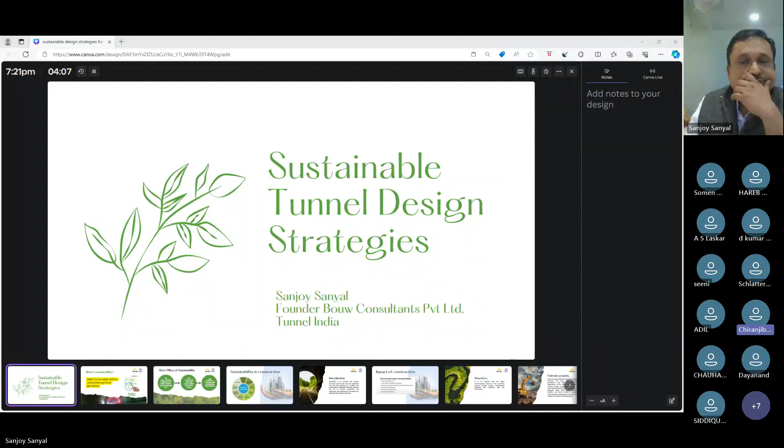Just let me know if it is visible. Yeah, it's visible sir, you can continue. Okay, it's visible right? Yeah, it's visible. Sir, if possible, you can also switch off your camera, maybe. Yeah, then you can continue again. We can turn the camera on again in the question answer session sir. Yeah sure.

Now I'm here to briefly present some strategies for designing tunnels based on sustainability aspects. As you know, a lot of things are happening around us with regards to sustainability and environmental aspects. When we talk about sustainability, it is not only about planting a tree.

It is more than that. Sustainability, if you define it as per UN standards, was developed by the Brundtland Commission, which says that sustainability is all about meeting future needs.

Hello, can you mute this? Yeah, I think my screen is visible right? Hello. Hello, yes, yes sir, yes sir.

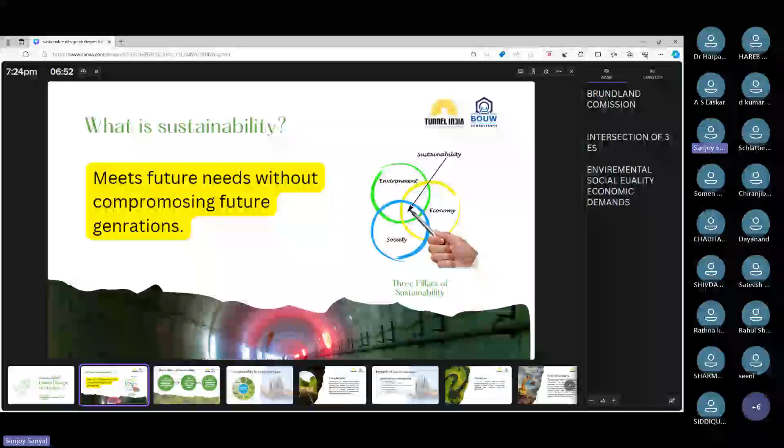So when we develop any project, any work we carry out for development, we must take care of these three circles of environment, economy, and society. We should coexist and meet our future requirements, like we need infrastructure, we need to extract minerals, we need to use energy, we need to use water resources. The main purpose would be using the resources in such a way that it does not hamper or jeopardize the requirements of future generations.

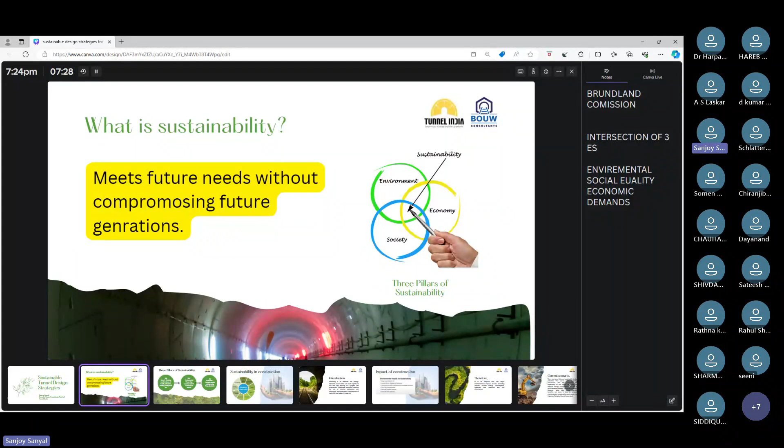If we go a little more in detail, we can say sustainability basically has three pillars. One, as I already explained, is social. Second is environmental, and third is economics. Social defines meeting needs in terms of health, education, housing, development, etc. Environmental is all about preserving species, natural resources, and energy. And economics is about creating wealth and improvement of living standards.

Now, sustainability in construction. When we talk about a specific application of sustainability in construction, it involves a lot of activity - we use energy, we use environmental resources like water, we extract minerals, we use steel, we consume cement and other minerals. In the process, we also produce waste, during the manufacturing process and even during the construction stage. So in this respect, we also need planning, like how we are going to utilize our resources to minimize waste. That planning, that strategy, is also part of sustainability.

When you talk about sustainability in material, we can use innovative material, like we can replace use of steel with GFRP, polypropylene fiber, or similar things. When you use high tech material, we can reduce use of material.

In case of a tunnel, if we do lining, we use concrete. In order to produce concrete, we generate a lot of greenhouse emission, a lot of CO2. So our motto, from the design stage, should be such that we use optimal or minimum quantity of innovative material, so that carbon emission can be reduced.

When you talk about other activities like climate adaptation, our design should be such that it does not hamper our environment. It should comply with nature, as far as possible the environmentally conscious design - that is also part of sustainability in terms of construction.

When you talk about procurement, we need to have a proper plan and strategy, how much material we need to procure and at what time, and what kind of material we can reuse, like excavated soil, excavated rock - how much you can use in a bridge, how much you can use in backfill. All this needs to be pre-planned so that we try to use local material and avoid transportation, since transportation creates a lot of greenhouse emission, CO2, and pollution.

So all this aspect is a part of sustainability in construction.

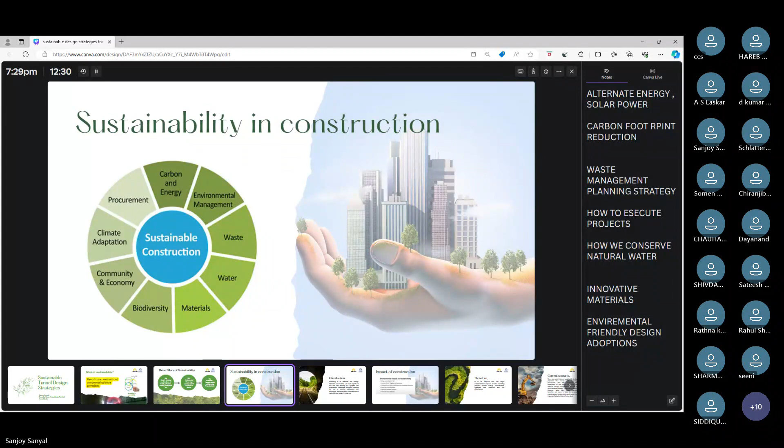Now we are coming down to specific application in a tunnel. Tunnel construction is an extremely energy intensive process that can have significant site and cost bearing on a project and community. Traditionally, tunneling uses massive equipment and machinery and substantial consumption of material and natural resources. In a tunnel or any construction project, we use maximum land, maximum material, and maximum natural resources.

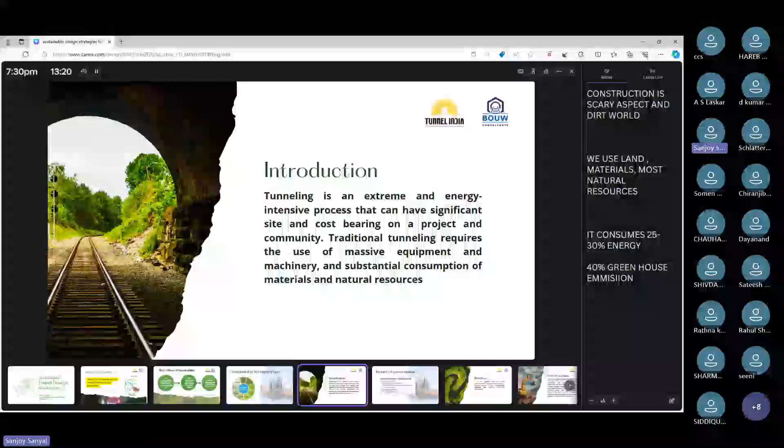Overall, construction consumes around 25 to 30% of the energy we totally produce, and 40% of greenhouse emission generated is responsible from this construction activity.

Now, the impact of construction - there are some key points. What is the impact on construction and environment? We see it is a major contributor to CO2 more than any other industry. Around 40% of all global CO2 emission is from our construction industry. It consumes over 60% of extracted non-renewable resources. Over 50% of landfill waste is generated by our construction activity. Over 40% of water pollution is generated by our construction industry. Over 20% of air pollution is generated by construction.

Therefore, there is no surprise that the major environmental impact of tunneling includes energy consumption, material and resources, and site disturbances. In the process of developing a tunnel or any construction, it creates a lot of disturbances around the location where we execute this kind of project.

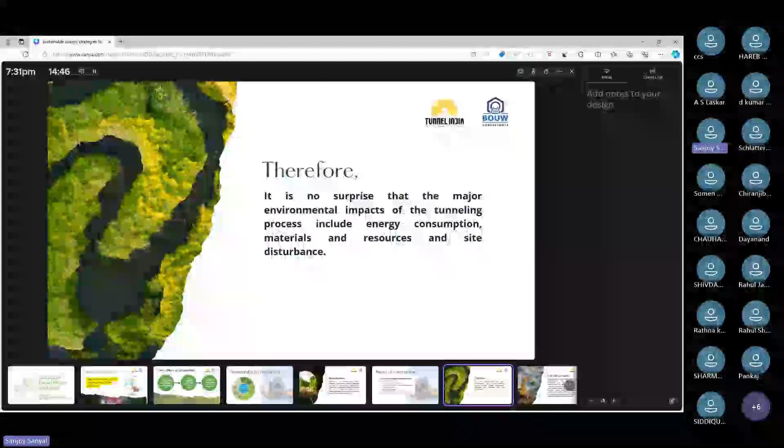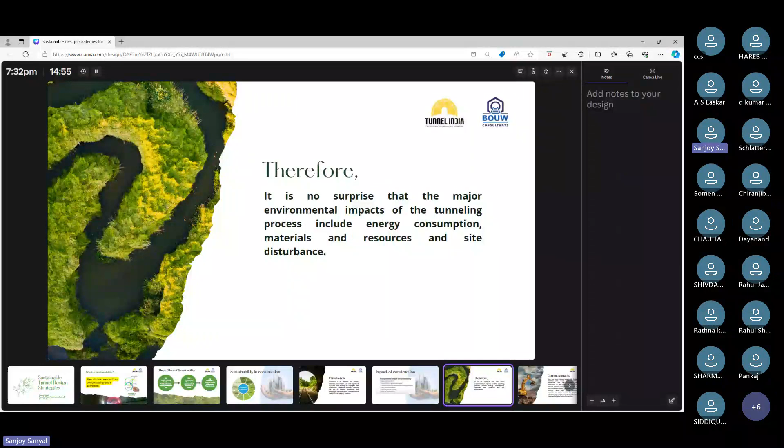It even disturbs local people and their earning. Sometimes you disturb their resources and their earning, the way they live in a forest.

Other than this, some of the things we do - we are not exactly doing that much, but we are using solar energy for tunnel construction and tunnel maintenance, and during the life cycle of the tunnel.

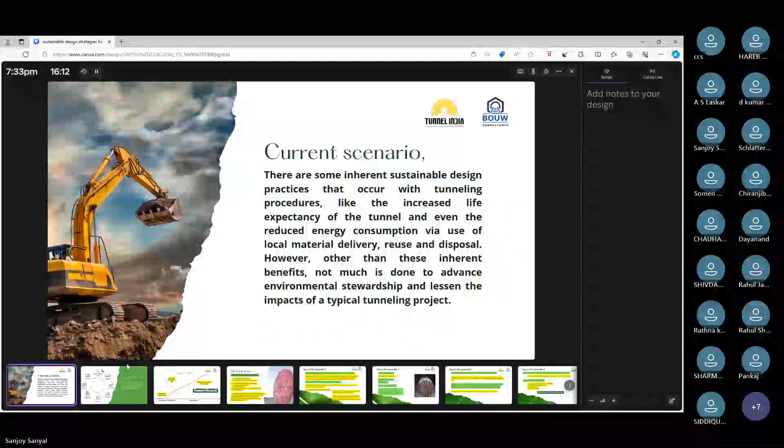Now, if we really want to develop a sustainable tunnel design during its life cycle, it involves various stages. It uses extraction of raw material from the mines, then it is transported to factories, where they produce cement, steel, rock bolts, and other mechanical and electrical items, and again we transport it to the construction site.

Construction depends on the methods, how we are going to execute it, what are the steps, what are the things, and exact planning is required. Then when the construction is completed, it goes on to maintenance and operation. When the structure is in use, then it comes under maintenance and operation.

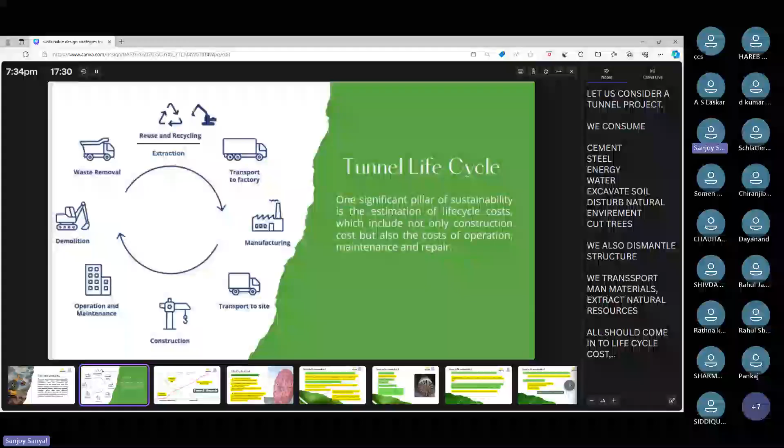That involves a lot of energy, a lot of material needs to be replaced, or we need repair, rehabilitation, strengthening. Then it also comes into demolition.

During the construction process, we demolish something. We need to develop a strategy for how we are going to reuse that demolished material, and then the waste removal. When you use the demolished material, you cannot reuse 100% of it. Once you use a certain part of the material, the rest you need to dispose of as waste.

So this total life cycle includes extraction of raw material or ore from mines, and goes up to tunnel demolition. All this aspect needs to be taken care of. It is not only about the construction stages, like we get the steel, cement, and just construct it. All the life cycle of the tunnel, starting from extracting ore to disposal, should come into picture if we want to really develop a sustainable tunnel design.

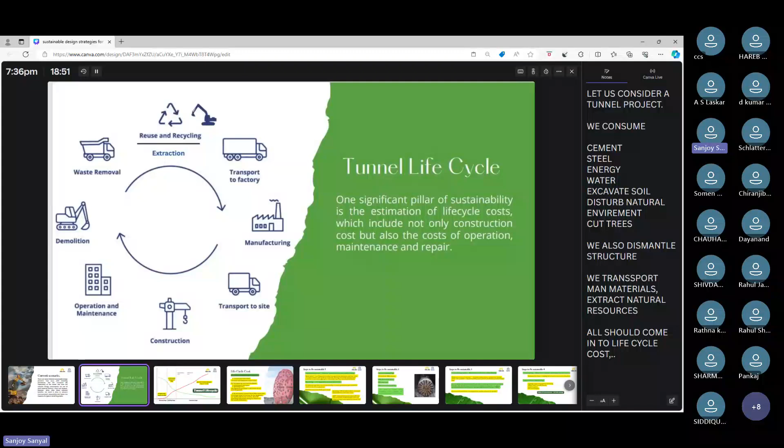And if you do not invest, do not do proper study at the beginning of the tunnel stage, like DPR stage or something like that, then the cost goes up. You do not have control over it. So it is always better that the DPR and other preliminary studies should be carried out very carefully, so that the overall impact during the life of the tunnel is reduced during the operation stage.

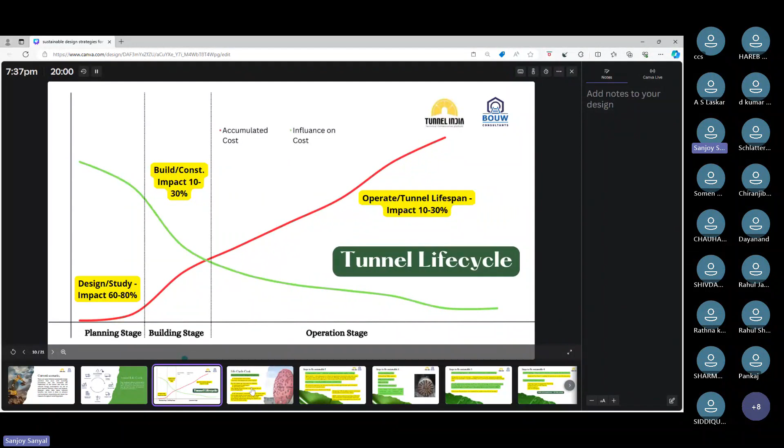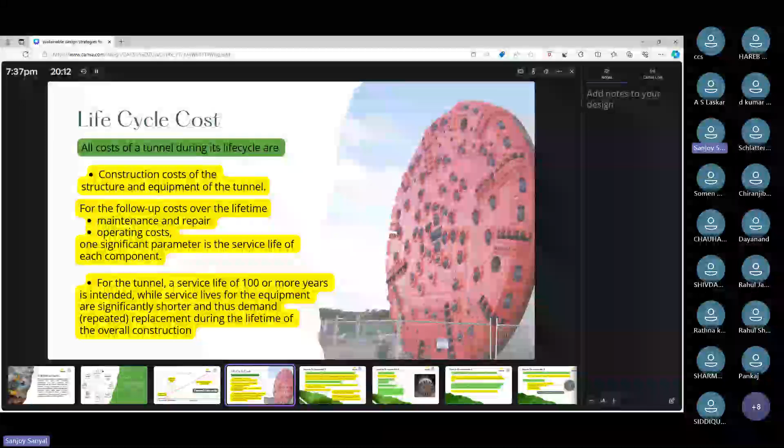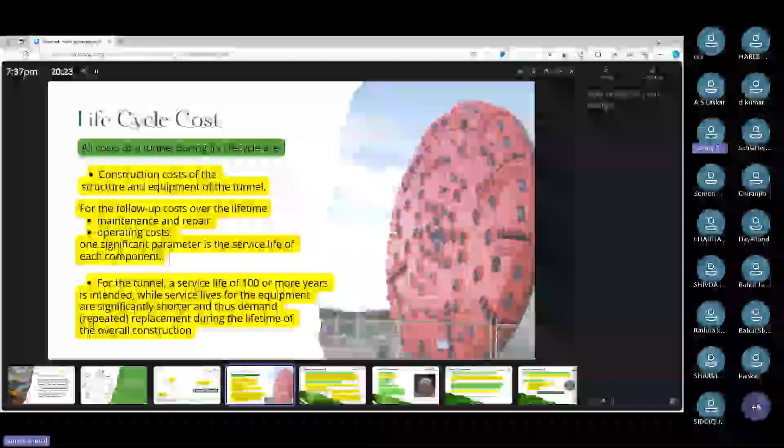Now, as I explained, life cycle cost includes all the cost of the tunnel during its life cycle: construction cost of the tunnel structure and equipment, and the following up cost over the lifetime - maintenance, repair, operation cost. One significant parameter is the service life of each component. We know that concrete can achieve 100 years of life and more, even more. But for mechanical parts and electrical parts, we have very limited life.

We have maybe 20 years. So our planning must be such that the replacement cost should be as optimal as possible. How can we do that? I think we need to develop a monitoring strategy or maintenance planning, like maintenance or repair planning. We need to have a periodic schedule of inspection, like visual inspection, detailed inspection.

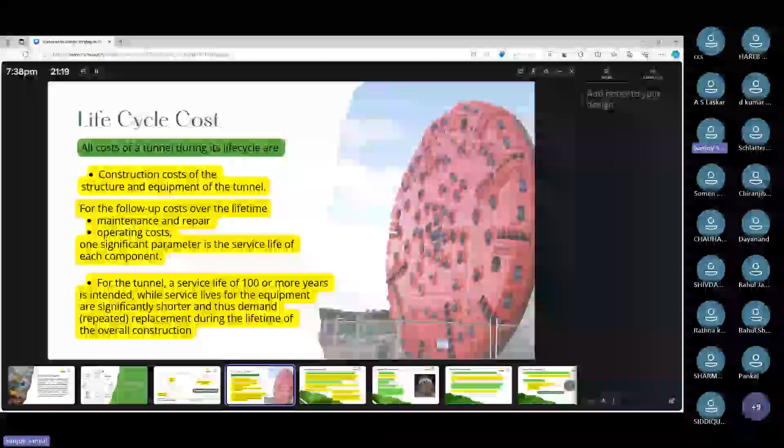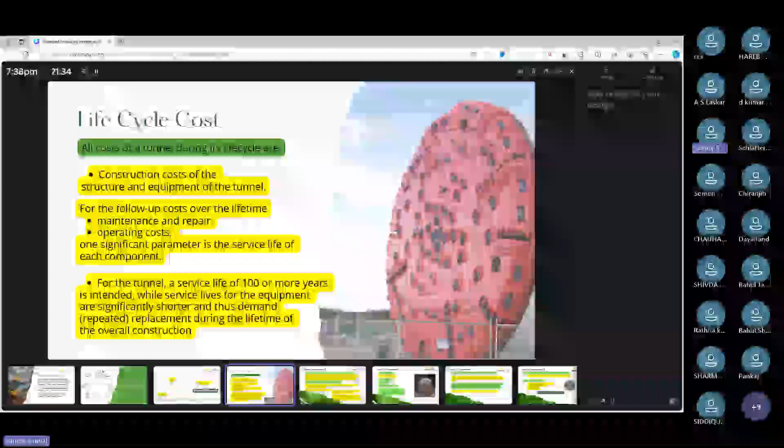Visual inspection can be done every month, or maybe twice yearly. We can do more rigorous inspection every 2 years, maybe every 5 years. We can do more detailed investigation. There are guidelines available internationally, so that we can plan it. We can plan the maintenance operation in such a way that we replace or take action so that tunnel operation does not get disturbed or hampered.

Suppose in a tunnel, the life of a particular electromechanical equipment, or maybe some lighting, ventilation system, SCADA system, needs to be replaced. So we need advanced information. If you do periodic inspection, you know when to repair and when to replace it. If you do not have any knowledge of what is happening there, you will end up in trouble because these equipments are not readily available.

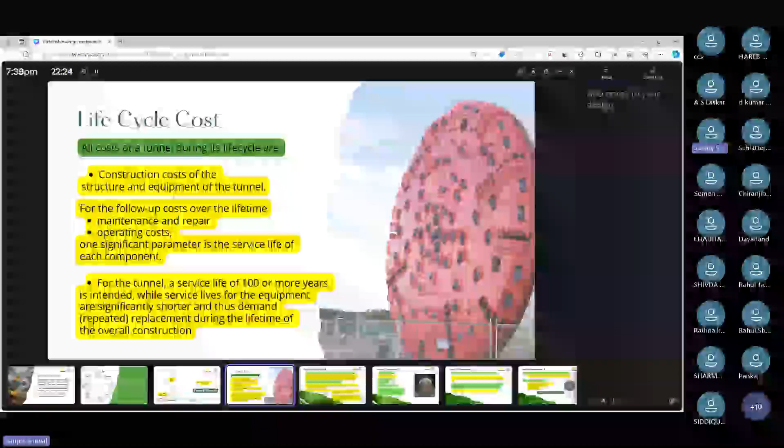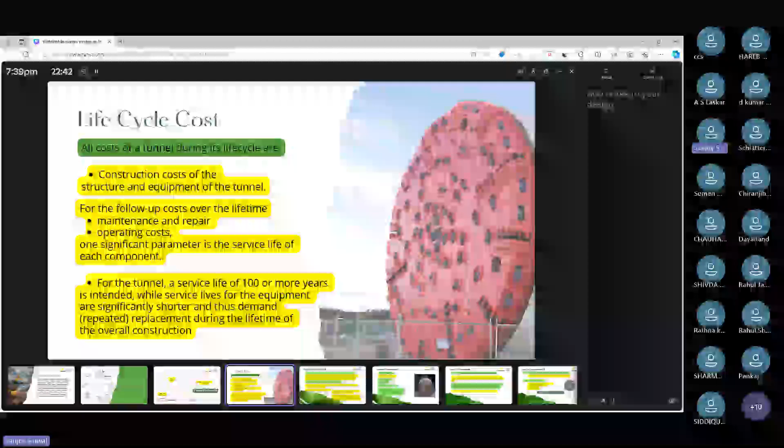So you need to have a plan, a definitive plan, so that you know which equipment needs to be replaced at what time, and when you need to raise a query, when you need to raise a purchase order, so that equipment reaches the site at the right time. Otherwise you never know that certain electromechanical equipment stops working, and you do not have any replacement for that, and you have to wait 2-3 months, so your operation is hampered.

As I already said, the service life of a tunnel is intended to be 100 or more years, while service lives of equipment are significantly shorter - there's a demand for repeated replacement over the lifetime, affecting overall cost. Sometimes what happens is that the civil construction cost is overtaken by this maintenance and replacement cost.

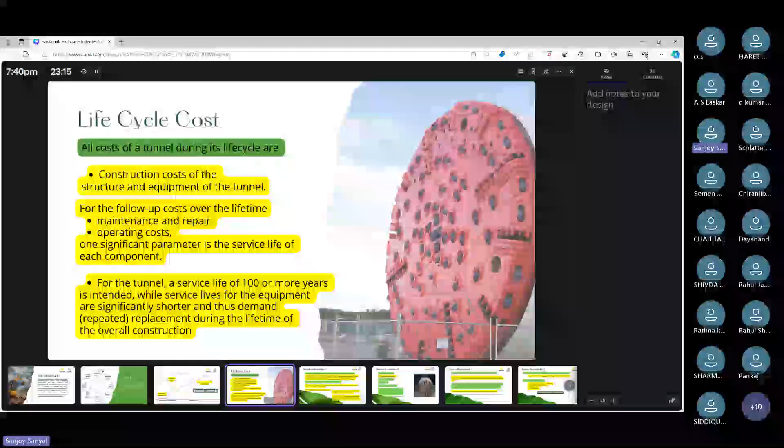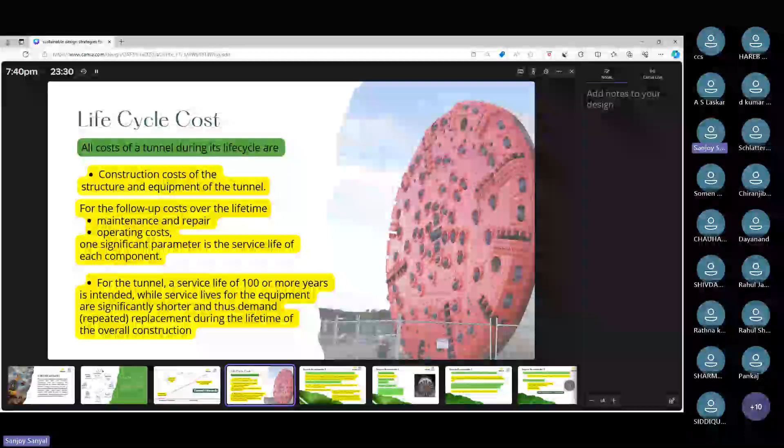If you consider 100 years of design life, and 20 years is your electromechanical equipment service life, then you need to replace it at least 5 times. If you consider electromechanical and other costs as 20%, you can multiply 20 into 5, so it is going to catch up with the construction cost of the tunnel. So we need to have a definitive plan.

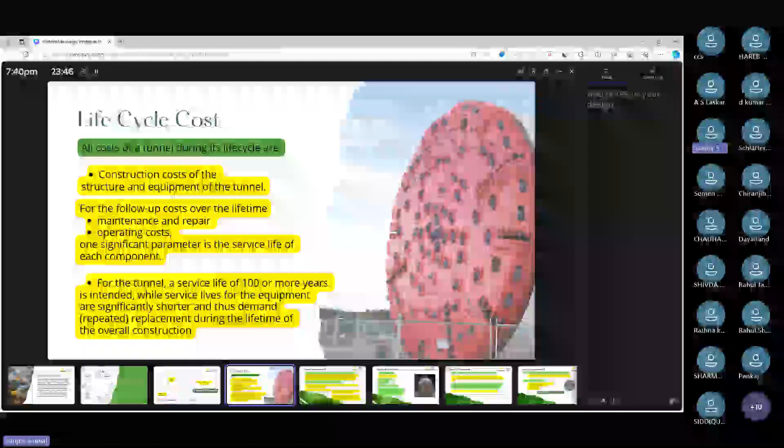Sustainability is not only about planting trees, it is about overall planning. You need maintenance planning, waste management planning, water treatment planning, like how we deal with drain water, how we utilize maximum energy, how we evaluate alternate energy like solar, and do we really need ventilation? That's a question I'll come to a little later.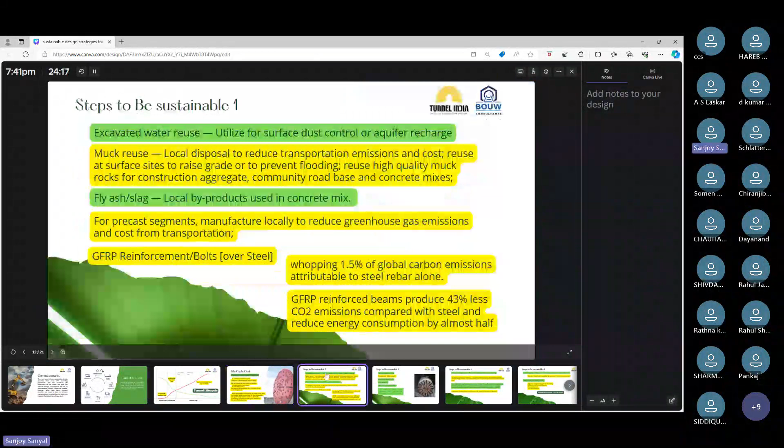Now let's go to the next slide. There are a few basic tips on how we can be more sustainable in our tunnel applications. Like excavated water reuse - you can utilize it for surface dust control, or maybe aquifer recharge.

For muck reuse, it is always advisable to consider local disposal and transportation. If you have lakhs of cubic meters of excavated rock or soil and you want to dispose it off totally, you need to transport it. For a tunnel like 5 or 10 kilometers, every day a truck which can carry 10-12 tons has to make n number of trips. It will generate huge amounts of emission.

So it is always better to have beforehand planning on how much muck we can reuse, either as a backfill material or as aggregate, fine or coarse. We can use fly ash or slag as local byproducts in the concrete mix, because the cement we use - slag is the byproduct.

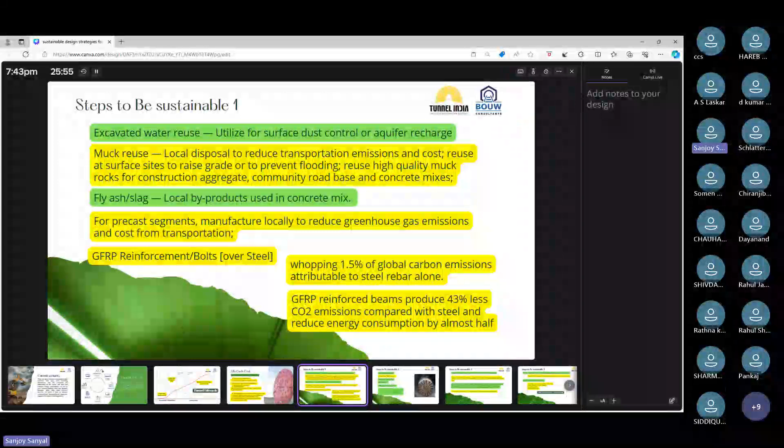Another way to minimize carbon emission is the use of precast segments. These are mostly used in metro tunnels, TBM tunnels, but even in conventional NATM tunnels this can be done. And GFRP reinforcement and bolts over steel - if you consider this, it's still not widely used. We are using it only for temporary bolting, like face bolting, or temporary construction works. However, this can be a good solution for the future when more detailed specifications and guidelines come in.

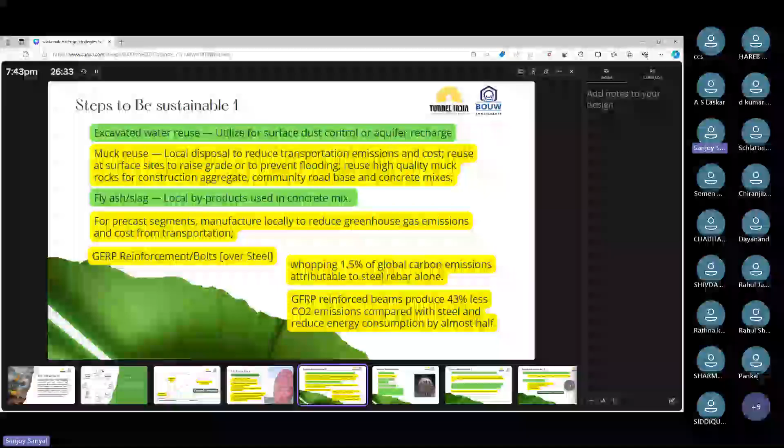1.5% of global carbon emissions are attributed to steel rebar alone. So if we use GFRP reinforcement bars, it will reduce emissions by 43% compared to steel bars.

Now another critical aspect is refurbished TBM. One TBM weighs around, not 200 tons, but maybe 1,000 tons. So if we can reuse it, that will obviously give us a more sustainable solution in terms of current projects, like refurbished TBM.

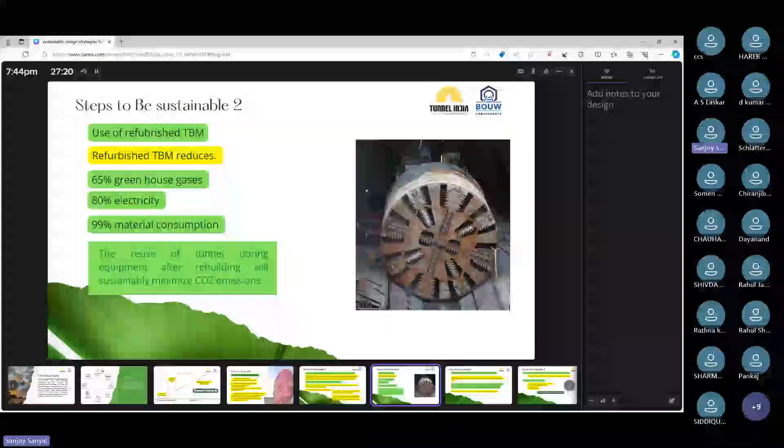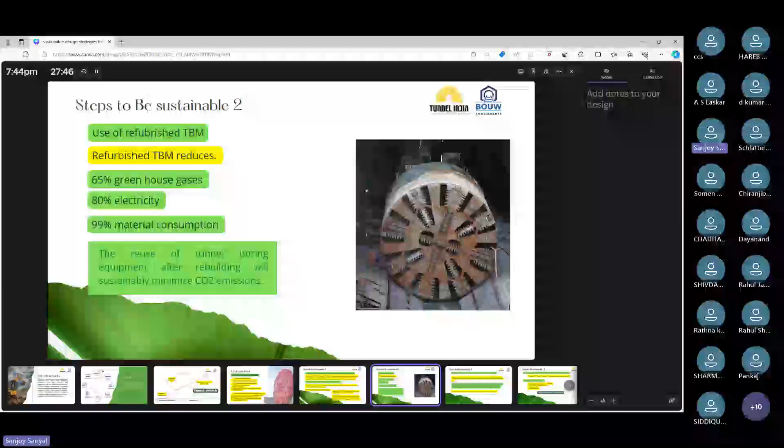What will it help? It will help reduce 65% greenhouse emission compared to a new one, save 80% electricity, and 99% material consumption. In case of reuse, we can only change parts or very small consumables - we do not need to change the total TBM. So TBM reuse is going to greatly help our sustainability in big tunnel projects.

But I should mention here that with refurbished TBM, we might get some trouble where people say that sometimes it does not work properly. But compared to that, if it's maintained properly, I think it can be done and can significantly reduce CO2 emission, energy consumption, and greenhouse effect.

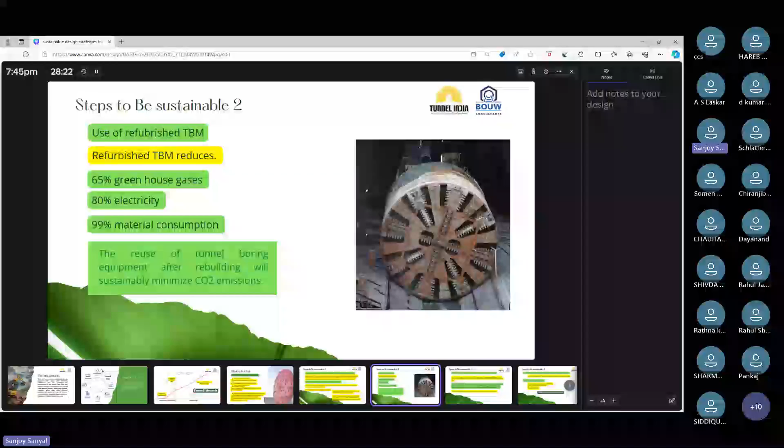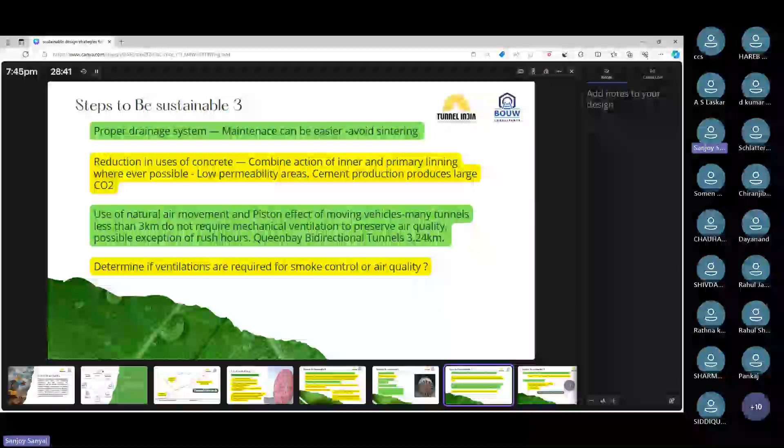Now another important thing in case of sustainability - as I've repeatedly said, sustainability is not about planting trees, not only during construction, it is also about maintenance. A recent study, and I have some data I can share here - some European or Austrian countries require more money to maintain tunnels constructed 30 years back than constructing a new one. Their major problem is drainage.

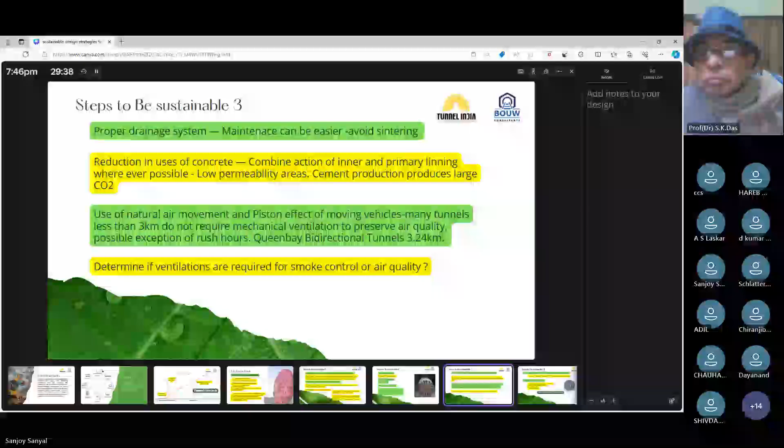The old tunnels' drainage systems were not properly executed. It was very simple, but these drains get choked, and once the drainage gets choked, the water cannot pass and pressure develops. So it becomes structurally bad - if it cannot drain the water properly, water pressure develops. If you cannot drain it properly, your drainage is choked, so obviously the tunnel will have water issues. So our drainage must be proper - there should be two kinds of drains.

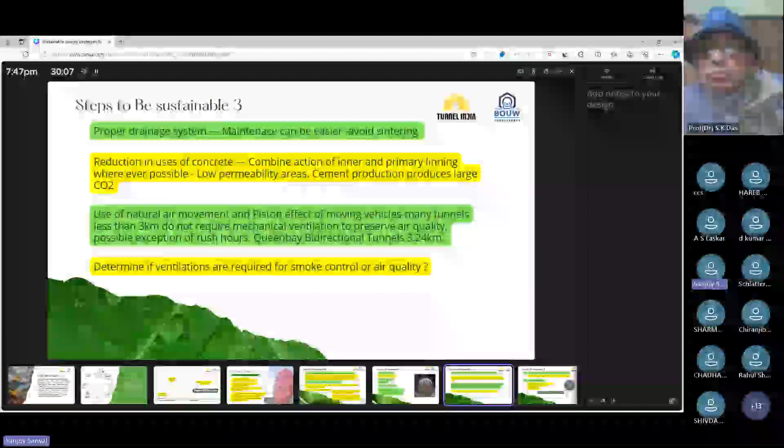One is groundwater and surface water. We cannot mix it, but in most tunnels we consider these as mixed and there is no proper drainage system. Second thing is sintering - the drain will get choked with the formation of some kind of carbonates, so this needs to be properly cleaned. We need a maintenance plan before proposing the drainage system, so we can monitor and keep it clear and no issues come up later during its service life. This needs to be very carefully designed at the design stage.

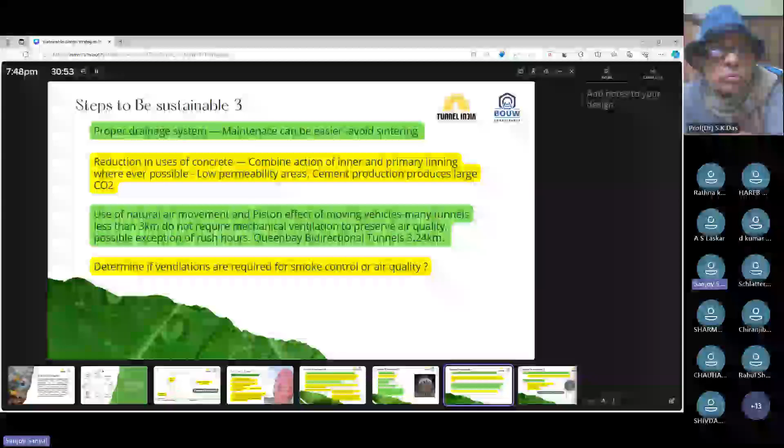Another point is reduction in use of concrete. Normally in an NATM tunnel we neglect the temporary support, temporary lining or rock bolts - we do not consider it as a long-term effect. But with the application of sandwich waterproofing membrane, we can consider it as a combined effect with the primary shotcrete and lining. If you consider both together as composite action along with the waterproof membrane, the thickness of the lining can be reduced, and primarily we can say that 30% reduction is possible. We have a lot of data for that.

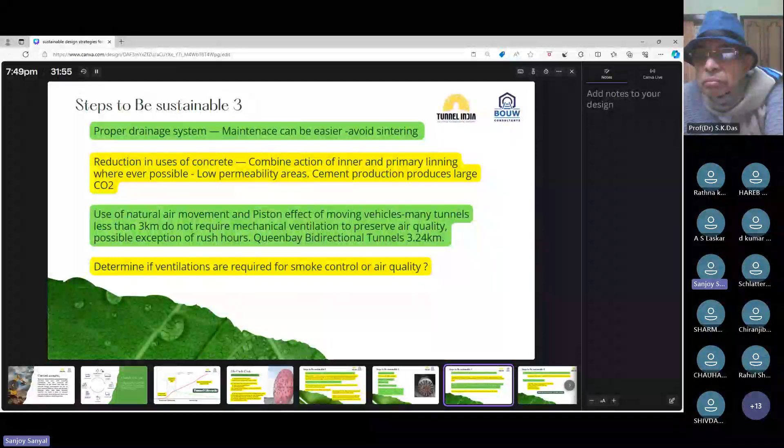You can refer to any waterproofing membrane manufacturer specification for more detail, but we can definitely use a combined system. However, one point to remember is that it might not work for all kinds of geology. In the case of London, they are extensively using this kind of composite lining because they have clay and do not have water issues. If we have water issues, this kind of composite section might not work, might not be that effective.

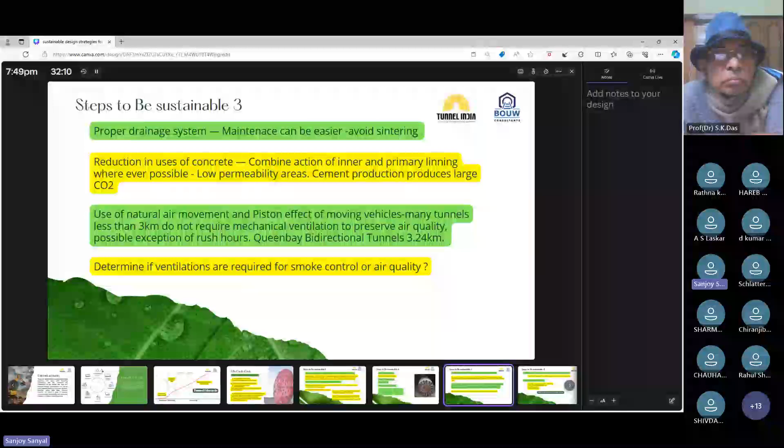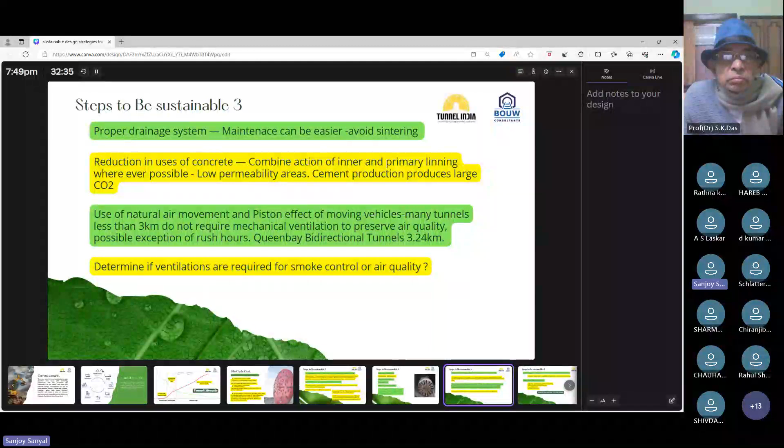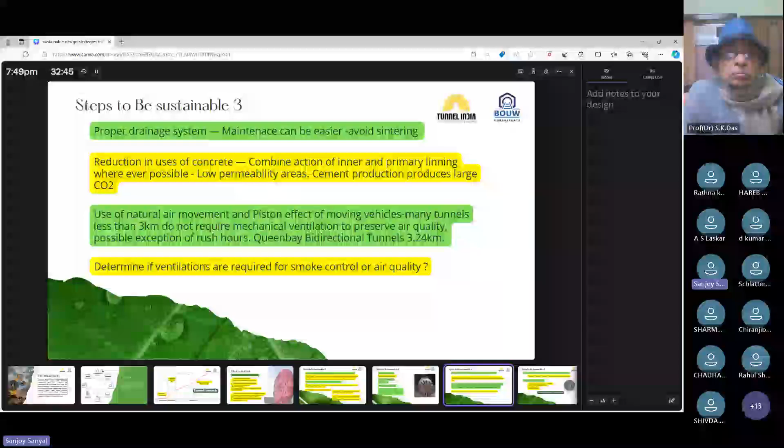Another thing is use of natural air movement and piston effect of moving vehicles. In many tunnels we do not actually need a tunnel ventilation system. If you think of a tunnel ventilation system with jet fans and total ventilation, you need a lot of energy during its lifetime. But if you really study and make proper analysis, some tunnels can use natural ventilation so the requirement of forced mechanical ventilation is very low. For example, the Queenbay bi-directional tunnel is 3.24 kilometers but does not have any mechanical ventilation system - it uses natural ventilation. Only during rush hours, in peak hours, do they use forced mechanical ventilation. The rest of the time, when traffic is low, they stop the ventilation system and rely on natural ventilation.

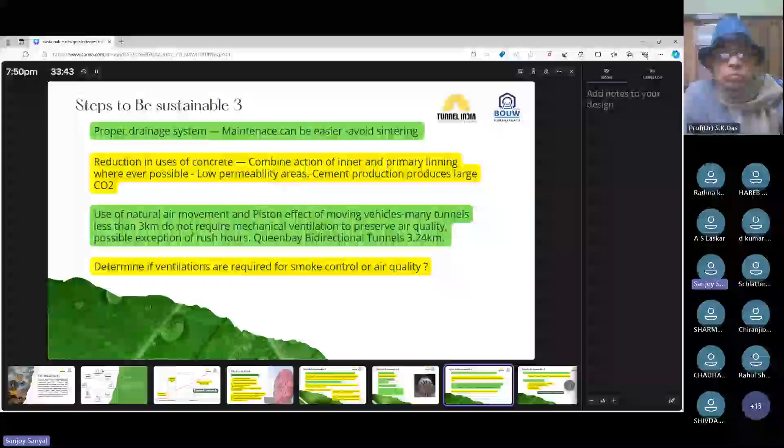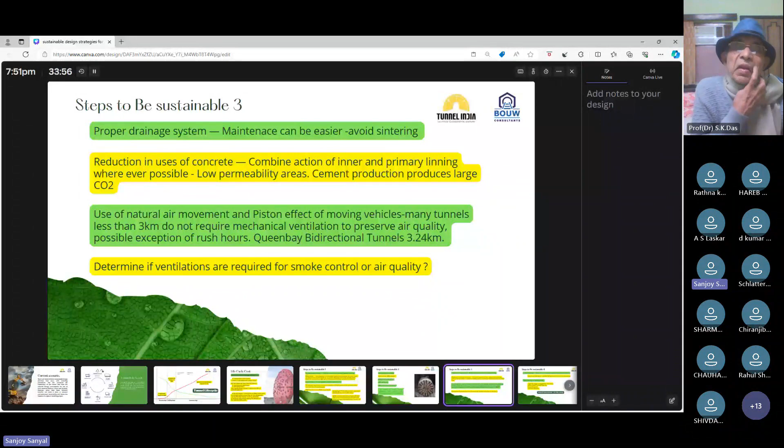So we determine the ventilation needed for smoke control or air quality. Ventilation purpose is twofold: one is, in case of fire, we need to get rid of smoke, and the other aspect is during operation of the tunnel we need to maintain air quality inside, with parameters like NO2, CO2, or oxygen level. So there are two purposes, but we need to specifically check what is the basic purpose of putting in ventilation.

If it is required for maintaining air quality, then you have to have a proper mechanical ventilation system throughout the lifetime of the tunnel.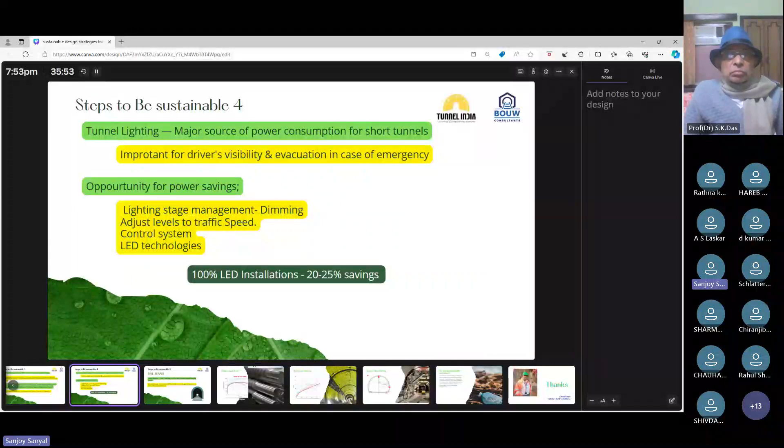Yes, and this is very interesting. When we talk about rail tunnel, most of the rail tunnels we see are single line, like single line broad gauge.

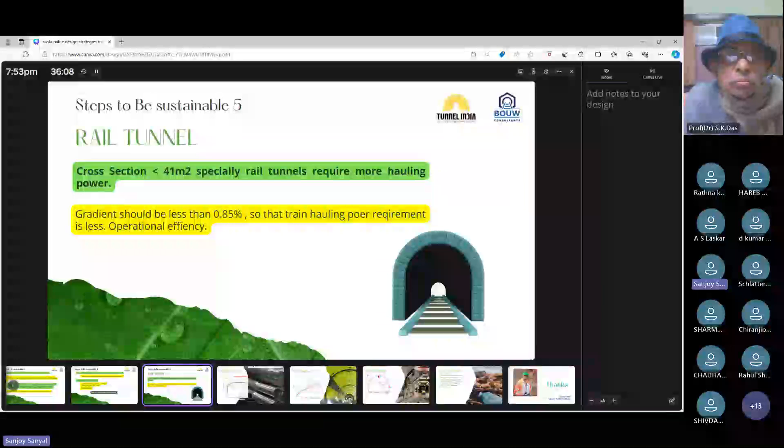So the section requirement in a study, it has been observed that if the section is less than 41 square meters, the drag force inside the tunnel is too big, so the train requires more energy to pull it out. So any section less than 41, we should not go for, because the tunnel is going to be operational for 100 years, and if you propose a section which is 39 or 35, it will increase your energy consumption. So we should have a section which is not less than 41 square meters.

It is technically proved. There are papers which can support this as proof. Another thing, gradient should not be more than 0.85, because if we give more gradient, then train hauling power required will be more, and operational capacity efficiency will be reduced.

This is a typical case, I think, from when we were doing our masters in the University of Graz. They said that in Austria there is one tunnel where they estimated some issues with the alignment, so they were putting a higher gradient, but they calculated that the energy requirement during the lifetime is too big, more than the cost of construction of the tunnel. So they needed to change the gradient and increase the length so that their operational cost comes down. This is also a very critical point.

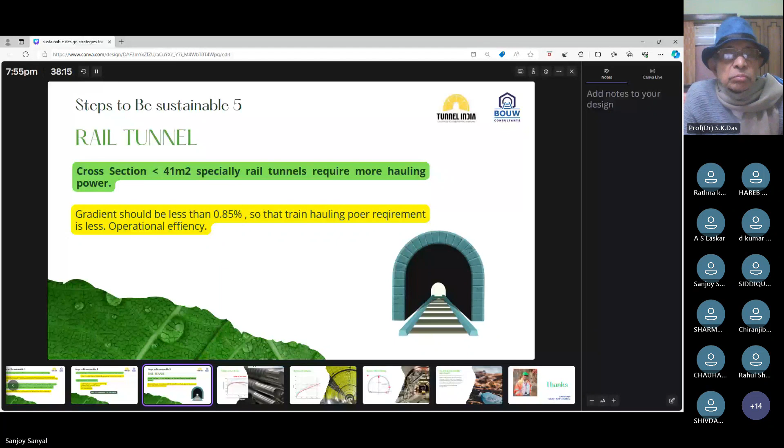Now there is something very interesting, though I cannot give more detail, but I can show you these graphs. There has been a study carried out in Europe on some tunnels which are in need of repair or refurbishment, and they carried out studies on a number of tunnels which are more than 30 years old.

If you can see the rock bolt strength, the horizontal axis shows strain percentage and tensile strength of rock, and the dark red line is the new one, while other lines are existing tunnels. This shows that there is not much deviation, no deviation of strength of rock mass even after 30 years. Why I am saying this, I will explain later. This is one case of rock bolt.

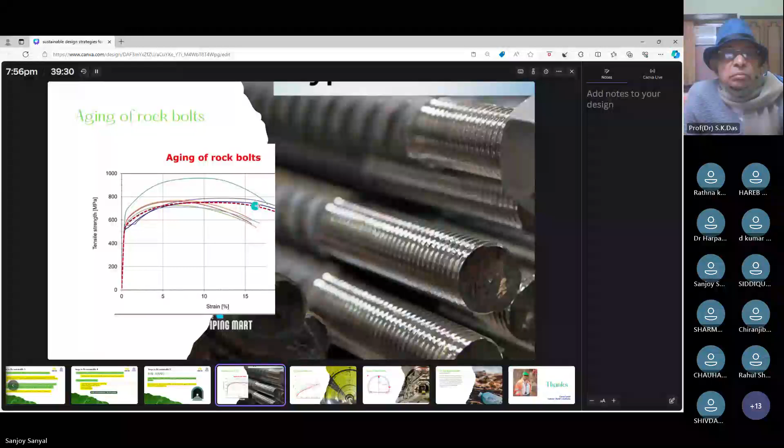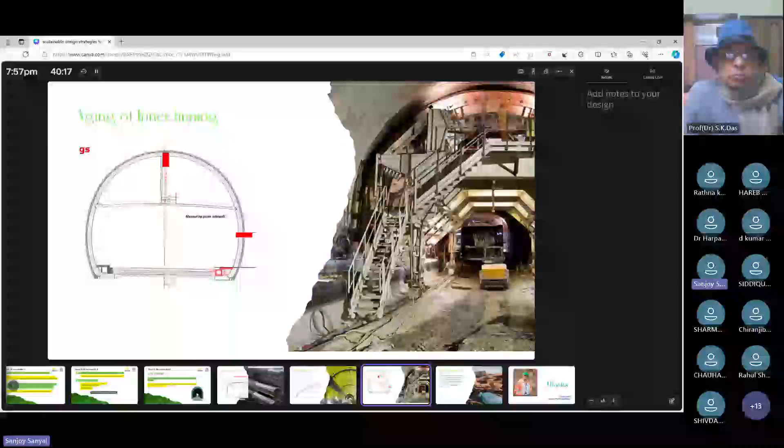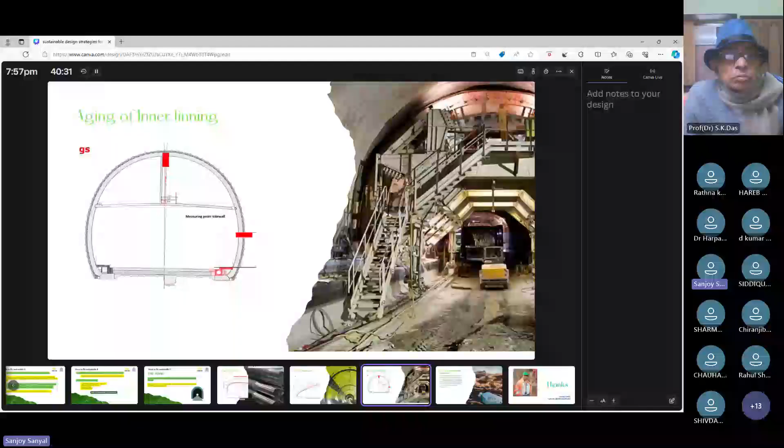And they have also carried out some tensile strength tests, UCS tests, for this tunnel lining. The location is the top and the side wall, and surprisingly they found that there is no reduction in strength of this lining. They found this for not just a single tunnel but a number of tunnels in Europe, one of the countries. This also shows that there is no degradation in the tunnel lining even after 30 years.

Actually, there is no significant stress, so it is intact. There is no significant stress on that.

So I am saying that the purpose of this is that it will help us in the future to develop a sustainable solution. We may not need double lining, we can go for single lining. That will significantly reduce the cost of tunnel, especially in India.

In India, if you see, there is a lot of discussion on this - no, we cannot do this, the reimbursement is higher, or do we really need this kind of inner lining, a final lining in a tunnel when it does not carry any load, because the inner lining and rock support system is strong enough even after 30 years.

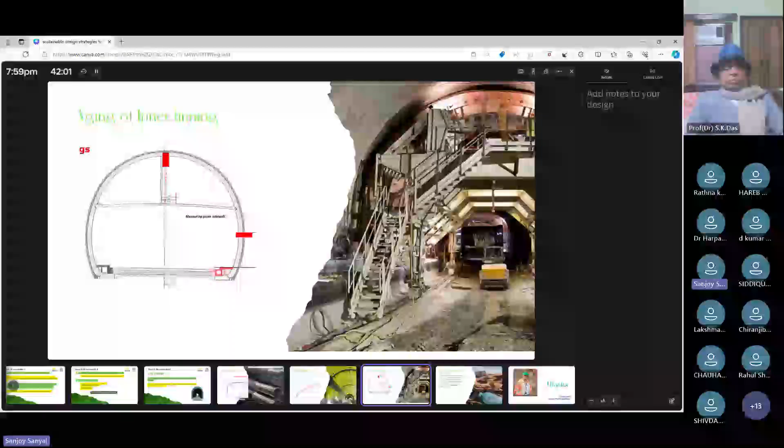So if you consider 30 years, it is not a permanent, temporary condition. The support measures we do, like rock bolts, primary shotcrete and everything, lattice girder, all of it is for temporary purpose, required during construction. But in reality, all these things are quite strong enough to take all the load for the lifetime.

So this might be a new way of doing a tunnel in future. But for that, we need to have guidelines and regulations. Till now, I think it is under research.

So at the end, why is sustainability important? When we talk about more than a third of all waste being generated by construction industry, it does not mean just the waste on construction site, but the whole life cycle of buildings, from raw material extraction to production, transportation, construction, operation, demolition, and waste management. So we are a major contributor to these kinds of disturbances to society and environment.

So construction industry must wake up to tackle these issues, because in our country we are going to have fast development, and we should encourage and develop a strategy so that resources can be optimally used without disturbing our ecosystem, and the design should be environment friendly. We cannot stop developing - we need development and fast development for our country, for our economic or social needs.

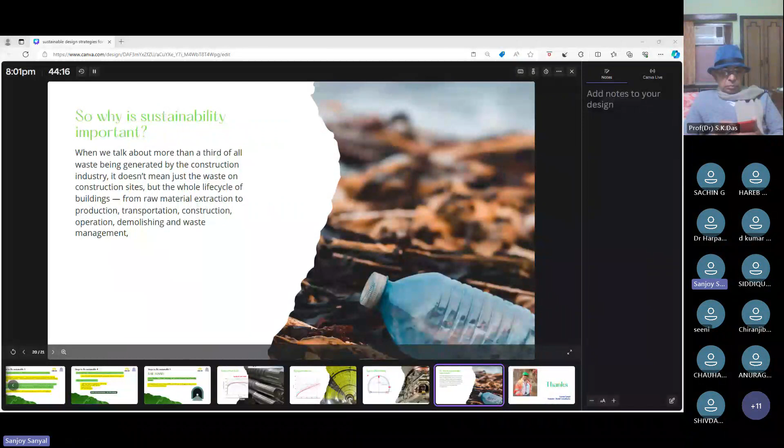And we can also use green power in terms of hydropower and solar. In recent developments, I could see that all the tenders of NHAI or NHIDCL are proposing some kind of solar system. This is good, it's a welcome decision. But as a whole, as a construction industry of tunnelers, we are responsible for adopting this kind of solution. Thank you very much.

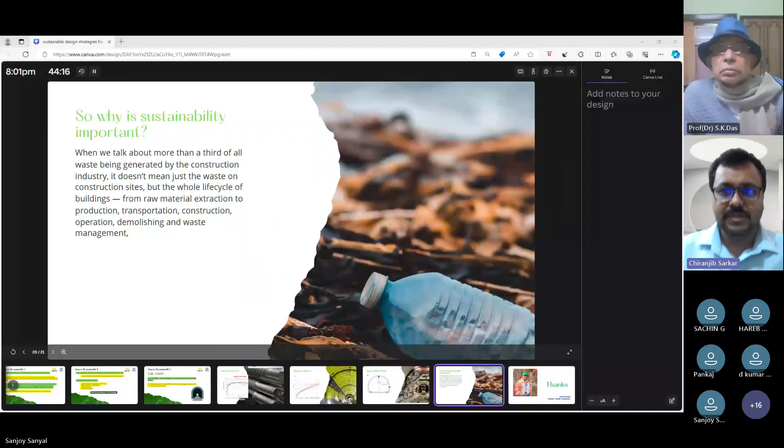I think it covers all about A to Z about sustainability in tunneling, starting from material, design, construction aspect - each and every aspect. It's a nice presentation. So now the forum is open for questions and answers. You can ask your question by raising hands, or you can text here.

Sanjoy, you can switch on your camera. So, there is a first question - is there any set of guidelines or standards for sustainable tunneling? I think we have guidelines, international guidelines. Yes, we have guidelines for this, but I can share it later.